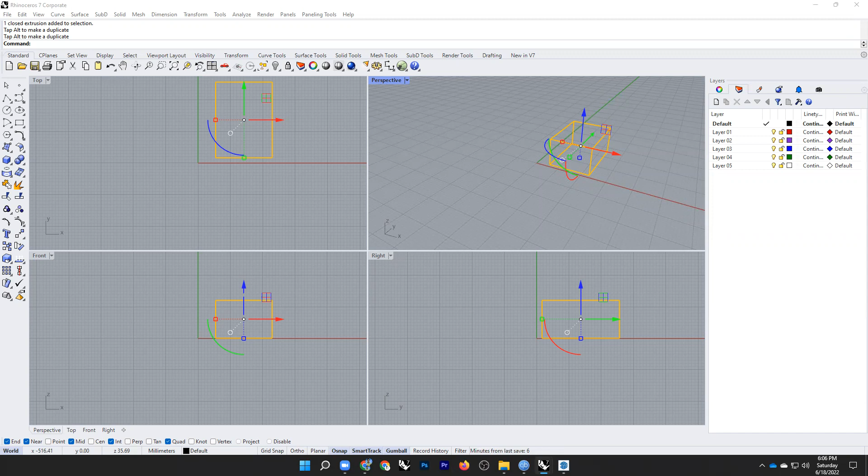So I hope you have learned all those carefully and practiced. First I will ask the students if anyone has any questions regarding the lessons that I gave in the first class, please feel free to ask. You can ask either in English or Japanese. 前回のレクチャーで分からなかったところとか、聞きたいところある方、ぜひ、発言、あるいはチャットに書き込みをお願いします。Any questions?

Okay, so I hope there are no questions. So I will start today's lesson. First, I will show you something, then I will continue in Rhino.

So Rhino is a very community-based program. You can find a lot of help in the internet and the community forums that are available. So after this course, when you work on your project or professional works, you will find a lot of problems and face difficulties. During that time, this part can be very helpful.

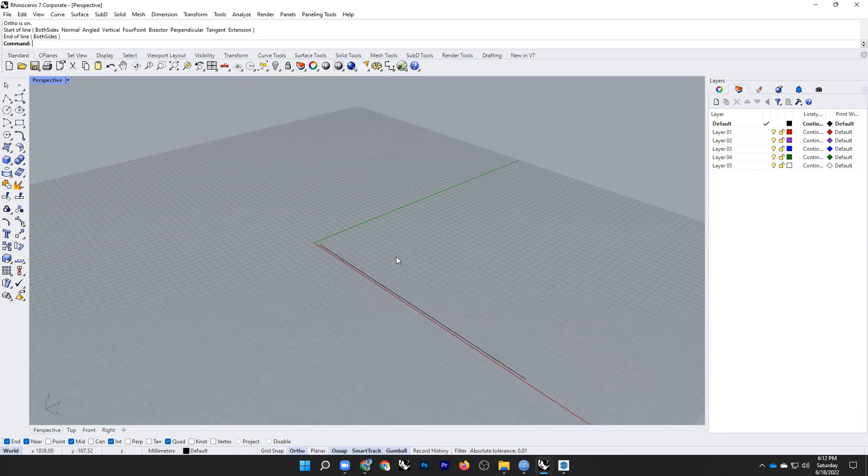One shortcut that is very helpful is F8. When you press F8, you can only draw a line perpendicularly. So when you are trying to draw something perpendicular, just press F8. When you are trying to draw something that is not perpendicular, you can press F8 again and draw the line wherever you want.

So this is for single line. Polyline is almost the same thing, but you can draw multiple line segments at the same time, like this, as a continuous line. When you are done drawing the lines, just right click and it will end.

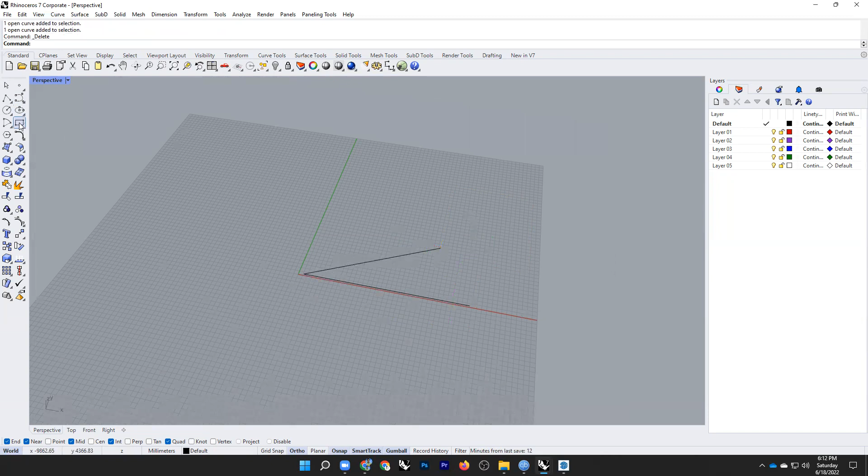Another shortcut you can do - I will remove these lines. When I'm drawing a polyline, something like this, if I want to connect the last and first point, I can just type C and enter, and it will connect the first and last point. It's very helpful - sometimes you need to close the curve and you can just press this.

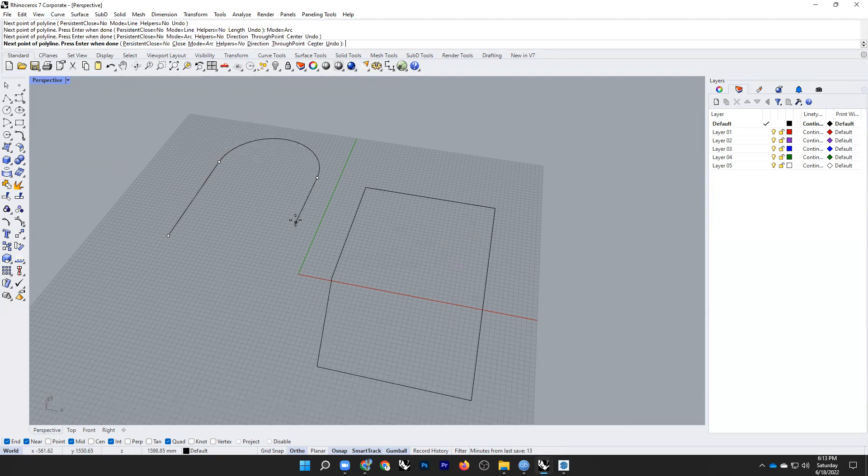Whenever you are actively doing something, you can see in this command bar various options. For example, now I'm drawing a line - if I go into mode, I can have arc, see? Then again I can go for another, and if I want to make a line, I can just make it a line.

Did you understand this, the last one that I showed? For example, if I have a room which is kind of curved from here, I can go to this mode and press F8, and again mode. So when you are trying to draw something like this, you can use this technique. Any questions?

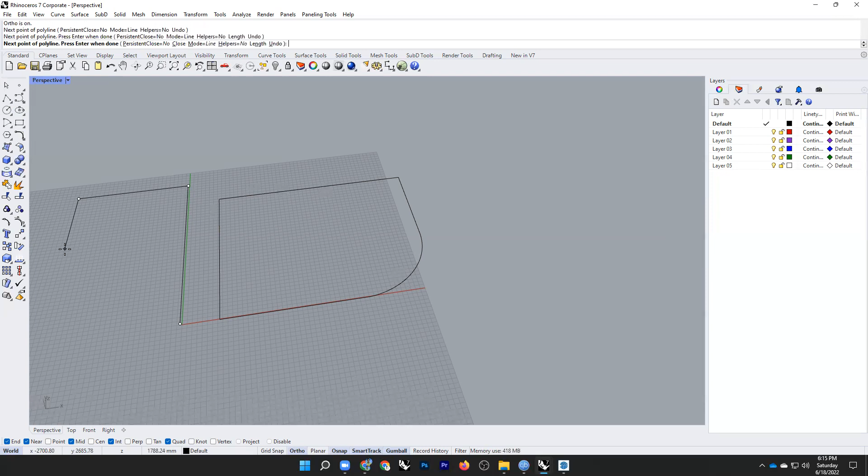Okay, so I'll continue. We have a lot of other options that are sometimes helpful, sometimes not. These two are very important: single line and polyline. Most of the cases, try to use polyline.

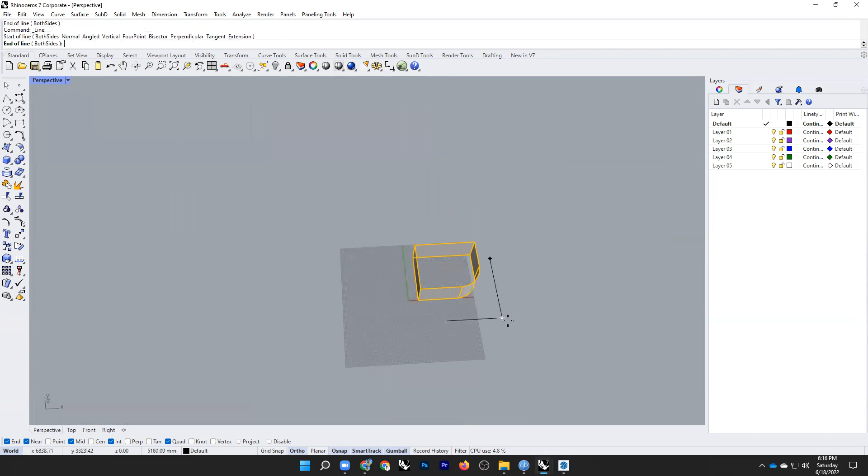The problem with line and polyline is that with a polyline, if you make this a surface, it's a single object. If I do the same thing using line, for example like this, and select everything and make a surface, it became individual surfaces. So it's not very helpful when everything is a separate object - it's more useful when everything is joined.

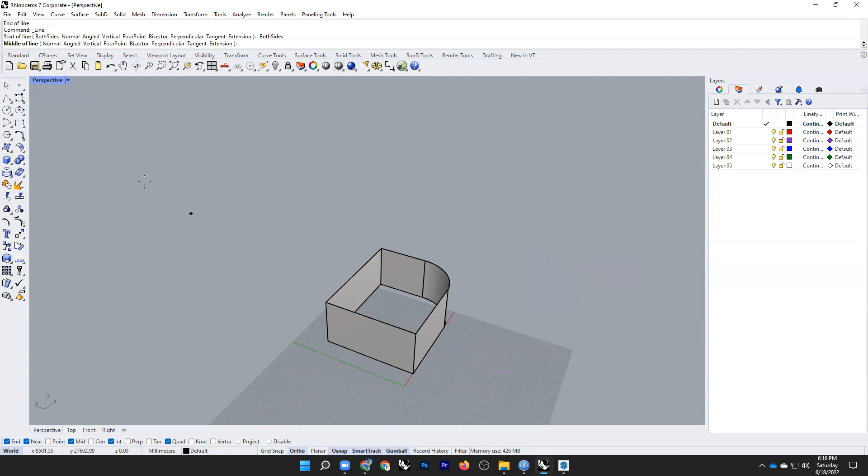So when you are trying to make a drawing, it's wise to make a polyline. Okay. Other options, something like this, are like you can draw a line from the midpoint. This option, what it does is you can draw a line starting from the midpoint.

Then we have this normal to surface - we can draw a line perpendicular to this surface. It will be helpful if you want to draw a line on a curved surface. For example, if you want a line on this surface, it's very difficult to draw a line perpendicular to it, but using this tool you can draw a line on the surface.

So this kind of other necessary tools you will find under this tab. I will not go into details on everything - you will learn when it's necessary. These are the basics, okay.

So the next topic is the various generic shapes that we need - for example, circle, rectangle, ellipse, etc. The first one is circle. You can draw a circle in various ways. This is very simple: you select the center point and the length of the radius, and it becomes a circle.

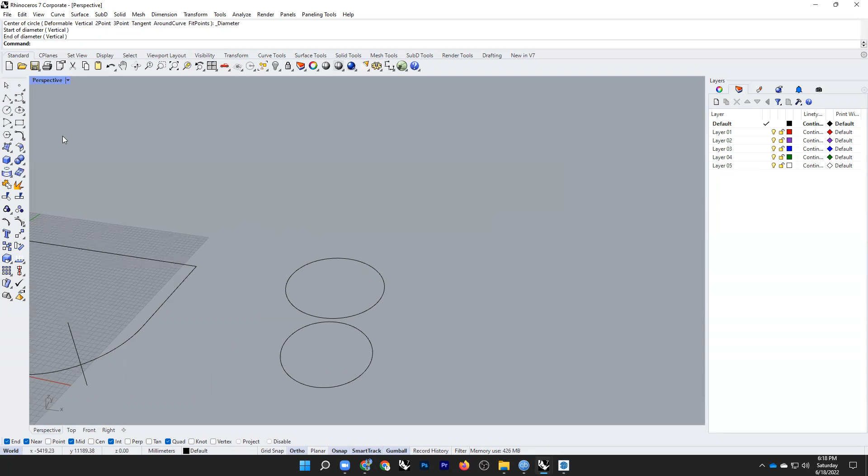Similarly, you can have diameter - so this is diameter. Then you can have 3 points, for example if you want to draw a circle which touches all these 3 surfaces, 3 lines. So this kind of circle you can draw with the help of these steps.

And there is ellipse - ellipse is also very simple. You can draw an ellipse like this. You always have the descriptions when you select something.

For example, if I select this one, in the command bar you have this command, like you need to pick the first focus. So this is my first focus. Then it's asking for the second focus, so this is my second focus.

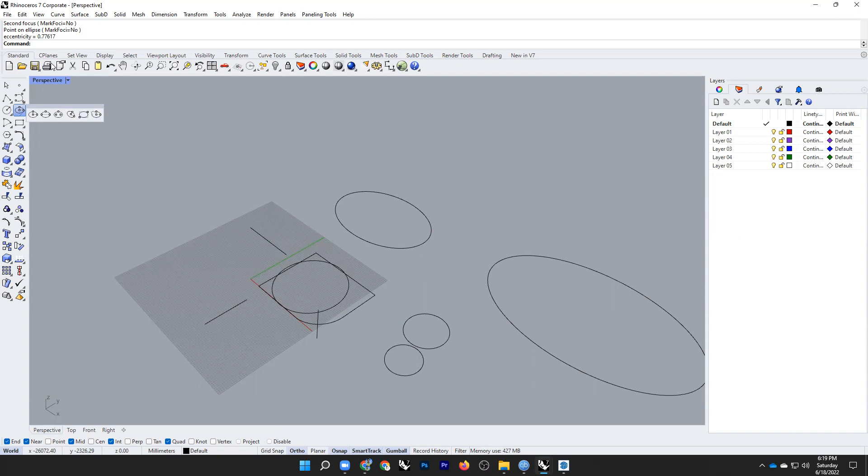And then point on ellipse, so this becomes an ellipse. Whenever you select a command, you will always have the options it's asking for in the command bar, so always look at how it's asking. For example, if I select this one, it's asking for the first corner and the second corner. So this ellipse is inside this rectangle, something like that.

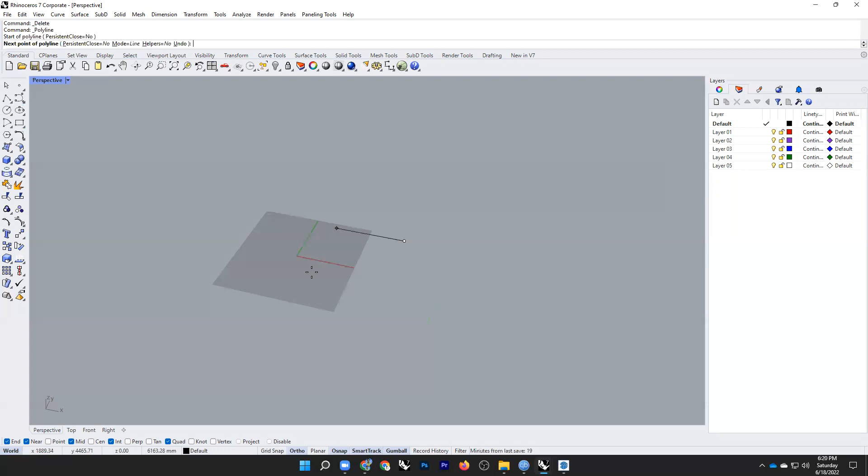Then we have rectangle, it's very self-explanatory: one corner, second corner, done. You can also draw a rectangle in various ways. For example, if I have a curved line, pressing F8, I can draw a line like this. If I go for these options, I can draw a rectangle perpendicular to this line. Normally when I draw a rectangle it's always along the axis, but with this option I can rotate the rectangle like this.

Okay, so these are a few options. Finally, we have this polygon. Whenever you go for a polygon, it will ask for the number of sides. When the number of sides is 3, it becomes a triangle. If I go for 4, I can draw a rectangle. If I go for 5, it becomes a pentagon. Similarly, you can pick any number and it becomes a polygon with that number of edges. So this is the way you can draw various generic shapes.

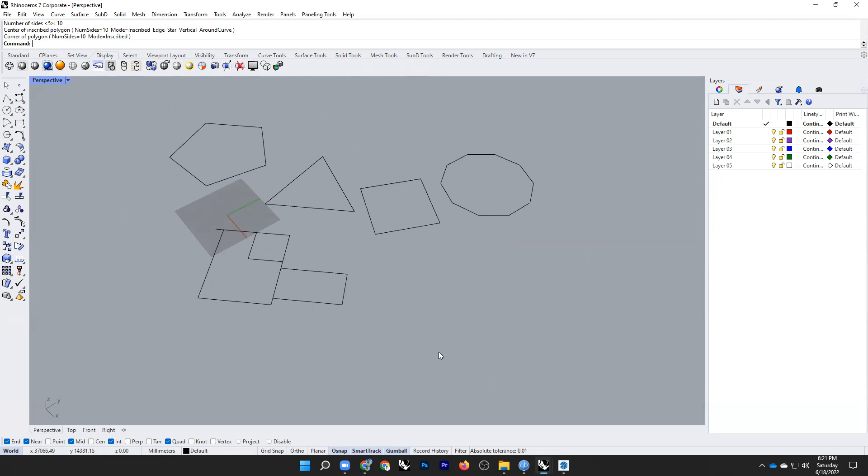Okay, would you like to explain, and please ask if anyone has any question.

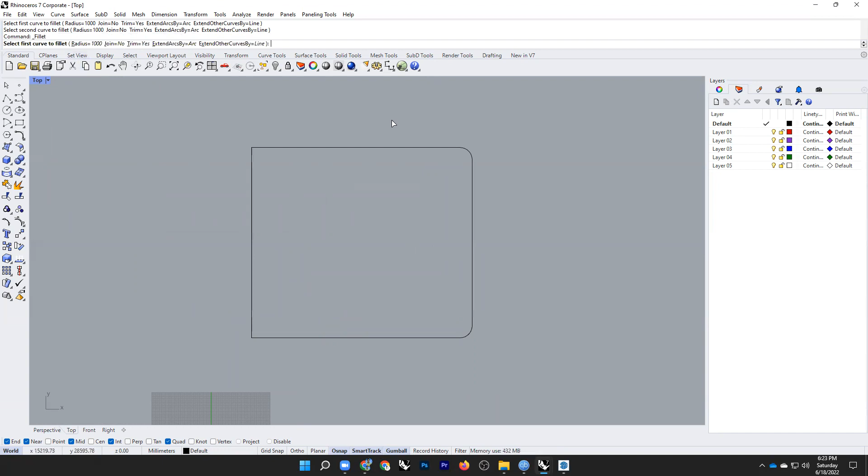And as I've already said, all these individual commands have other options, like do I want this to be joined, do I want the original curve trimmed, etc. So the join is set to no for now, that's why.

So if I go now, I give join, so now it's joined. If I set trim to no, and do the fillet, this is not trimmed, so we have the original curve and also the fillet one. Usually we want this to be trimmed, so make it yes, then you can do this and it will be trimmed like this. So this is how you do fillet.

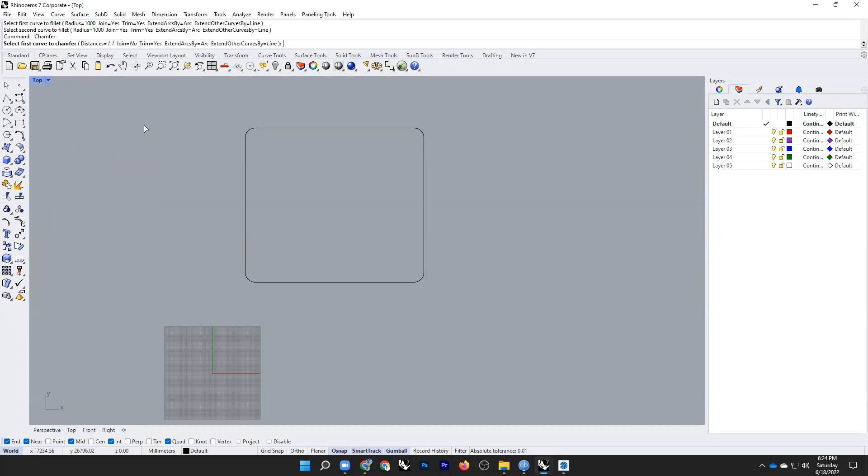Okay, there is another similar thing called chamfer. What it does is make this kind of angular. When you have two curves like this, it cuts like this and deletes this. Let me show you that.

Let's draw another rectangle. Okay, I'll do this. Next one, chamfer. We have two distances, the first curve distance and the second curve distance. I might want this to be longer and this to be smaller, and cut it like this. So you have these options, you can see there are two options, 1 and 1, written there.

And when I click on that, it's asking for the first chamfer distance, I can give it 2000. Second chamfer distance, I can give it 1000. Then if I cut, you see it's cut like this. So this distance was 2000 and this distance is 1000, like this.

The curve I click on first is the first chamfer, and the one I click second is the second chamfer. Another thing, have you noticed that I am using the last command without clicking or writing anything here? This is a shortcut. You can use the previous command by right clicking. Did you understand?

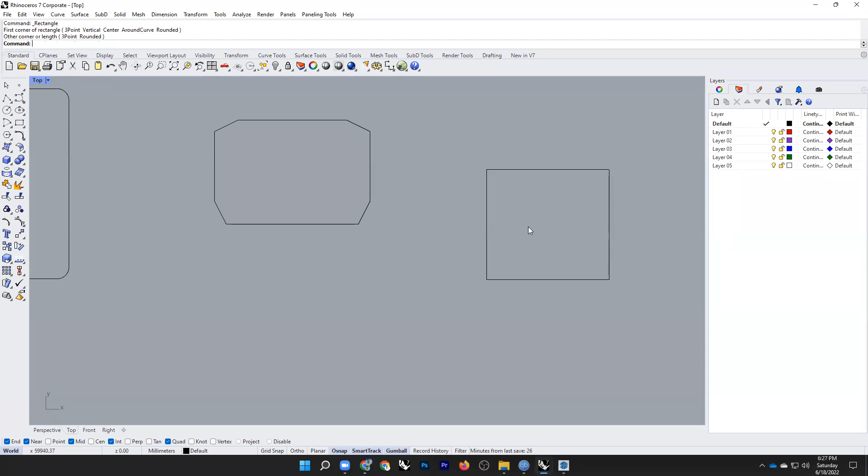Whenever I have used a command, if I want to repeat the similar thing or do the same thing again, I don't need to go here and click here or write the command. I can just right click and do the last command I did. This is very helpful for fast modeling.

For example, now I will show another thing, which is offset. Offset has a lot of options. For curve, just use the normal offset, and you have this offset distance. Let's keep it 500.

Now I can click on this curve and click inside and it will offset. Similarly, if I want to offset this one as well, I don't need to do all those things again. I can just right click and click on this curve. Everyone, have you understood this?

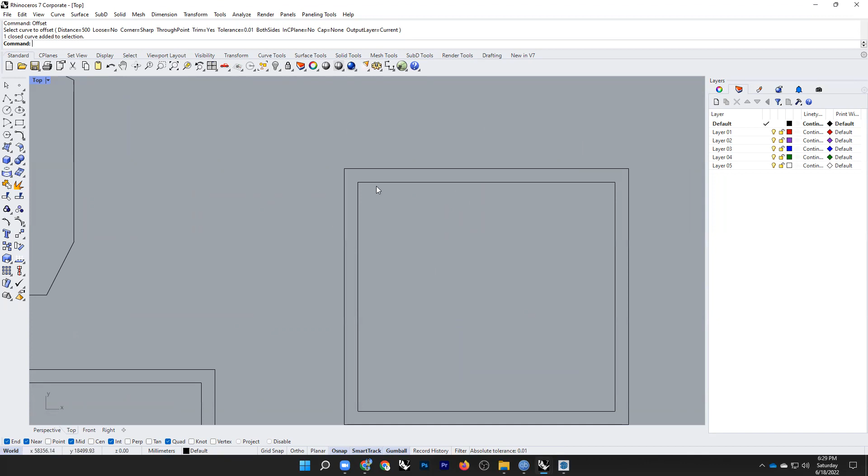So we have created a curve and now you know how you can edit various curves. I have already shown you, you can edit curves with Gumball as well. For example, if I want this offset to be more prominent here, I can just pick on this corner point and move it like this. This is the way you can edit a curve as well.

For example, I can press Ctrl Shift and click on this part and move this, and this can be changed. So this is the various ways that you can edit curves.

So now we will move on to making surface with these curves. The first thing that we'll show is planar surface. It's very important for our kind of work. So first you need to understand what is planar curve.

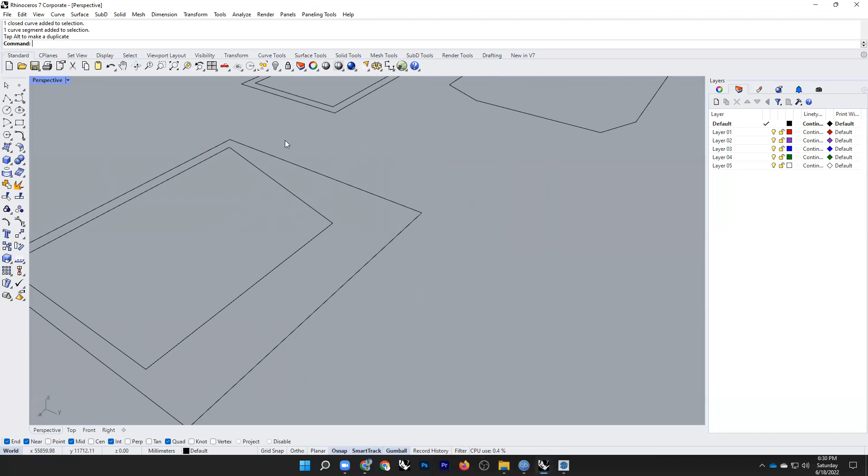Planar curve is something which is on the same plane, like on a flat surface. When a curve is on a flat surface, you can only use this command, otherwise it will not work. For example, this is a curve, and I know this is on a flat surface - flat surface as in elevation, there is no extrusion. So this is from elevation, it's just a single line, so I know it's flat.

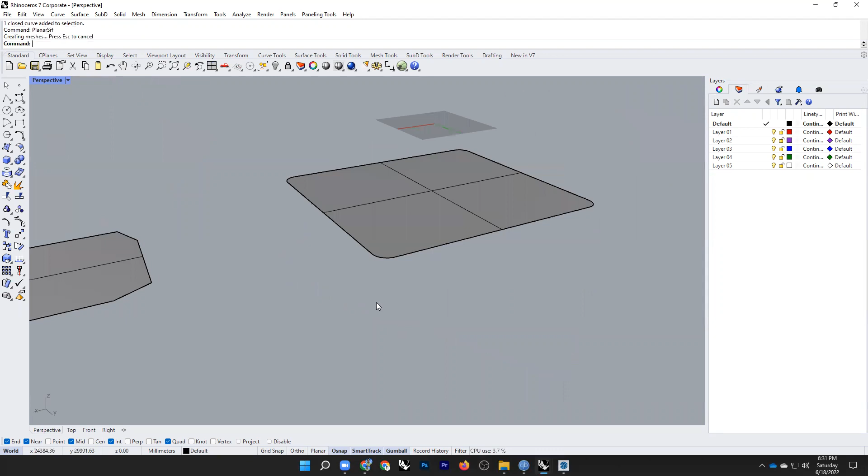So in that case, you can use this command. Just type planar SRF, PLANAR SRF. What it does is this curve works as a boundary and the in-between space becomes a surface. I can repeat this - selecting this curve, I write planar surface, and this is the surface.

For example, you have drawn two lines and you want to make a surface. If you select just one curve, it will make a surface inside. If you select only this curve, it will make a surface inside. But if you select both curves and type planar surface, it will make the surface in the intersection part. But sometimes it does not work.

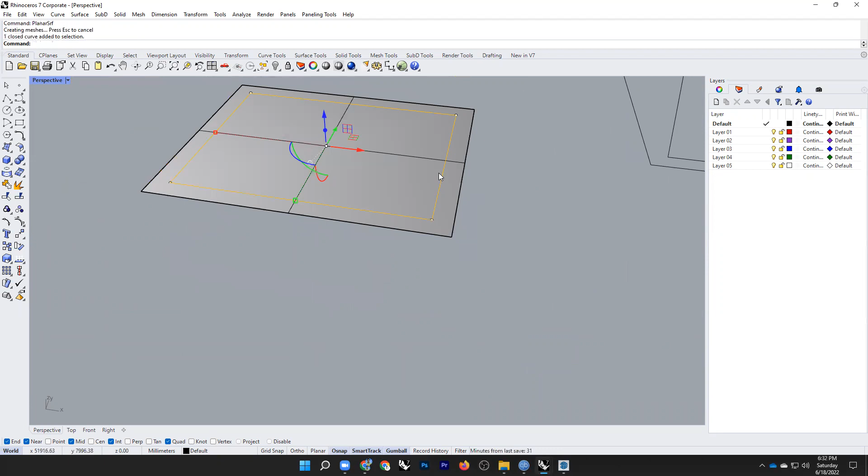Most of the time it will work like this, but if it does not work, we can do this: you can create planar surface and then trim with this inside curve. So selecting something, if I write trim, it will ask me for the object I want to trim. I want to trim this surface, so I click on this surface and now it trims.

Similarly, I have this drawing. Now I can press planar surface. I see already I have this intersection part as a surface. And if this is a wall, I can just now extrude and make it a solid object. So usually we have drawings from AutoCAD, or maybe we can draw the curves inside Rhino, then we can use this technique to create walls.

Okay, so any confusion, anyone?

I guess not. This is the way you can create surface from curve, but you also have options to create surface directly. I'll show you that now. In the meantime, if you have any question, please ask.

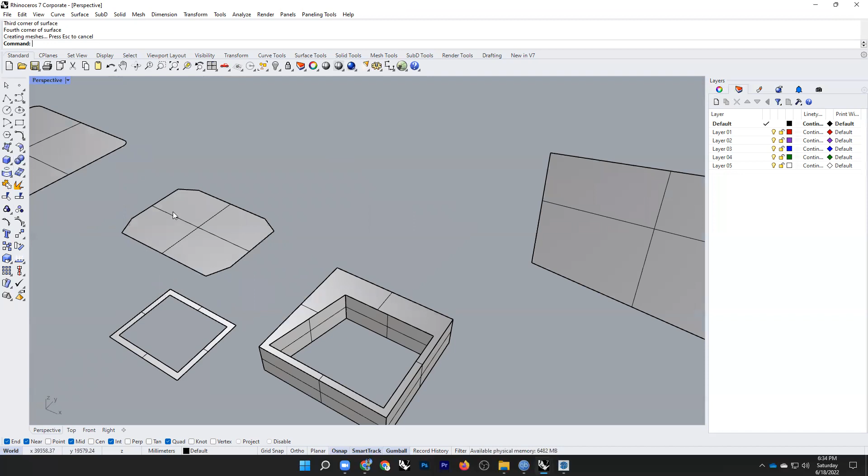And this planar curve, this is what I already showed you as planar surface. So when I have selected this curve and click on here, it becomes a surface. Very simple. And the next option is surface from network of curves.

This is very interesting. When you are creating something very organic, you can go for this option. I will show you an example now.

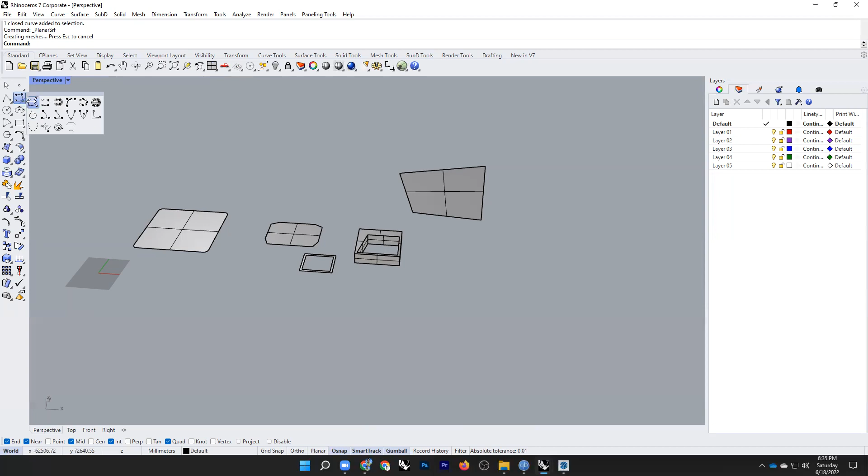So one thing I didn't show earlier is how you can draw spline, I mean curve lines. This curve line tab is here that we didn't show earlier. The first option is control point curve. Basically it makes this fluid curve. You can just go through various points and it will draw a very smooth curve along these points, something like this, and you can edit this curve by pulling these points.

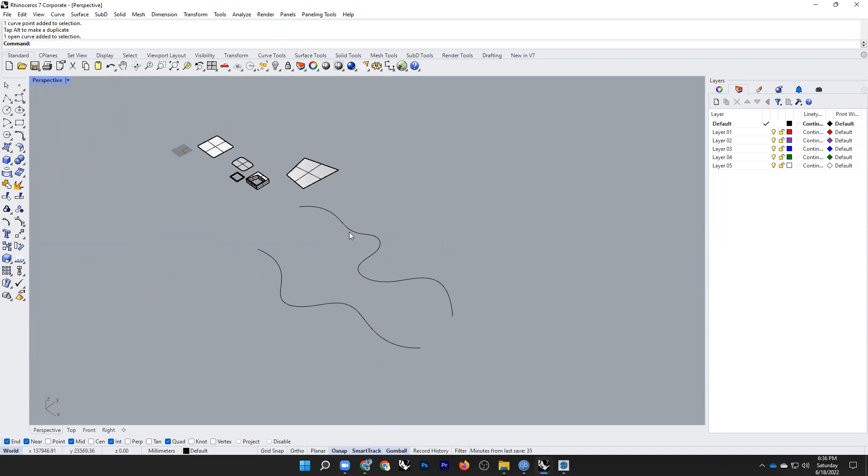So you can have this various kind of smooth surface. If you have this kind of curve points and you want to make a surface from these points, you can use the latter options. The first one is surface from network of curves.

So it will not work, I guess. For this, I will need to draw another curve in another direction. I will draw that now, so after that you can understand how it works. I will make a curve like this.

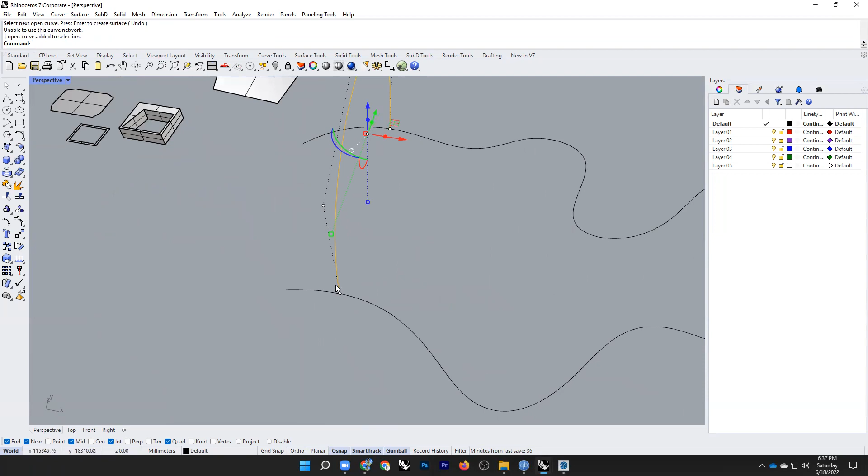And now if I go to this point, I will have to draw another curve. I will move this curve to these edges. I will copy one of this curve, this point to this point, and I will join this. So I am kind of making an outline of the geometry that I want to create.

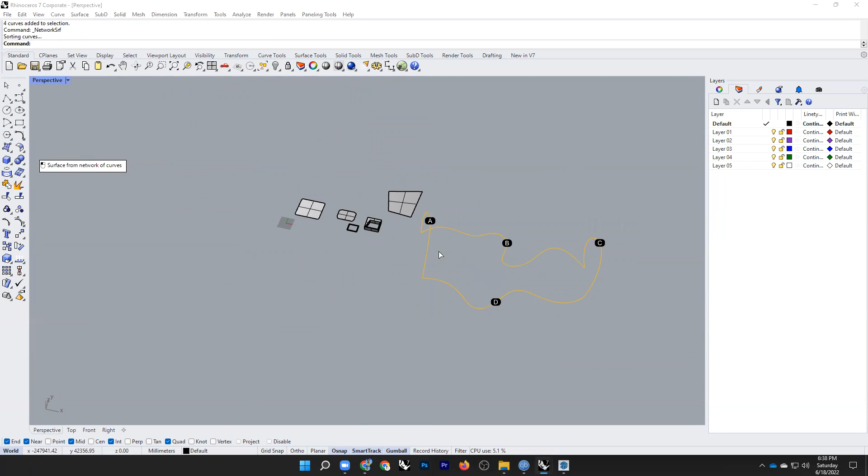So after that, if I select all this curve and go to this option, curve networks, I will have this tab, edge curves. Let's increase this, otherwise it is very huge. Let's give it 5. Something like this - so see, we have this very interesting shape just from 4 curve outlines.

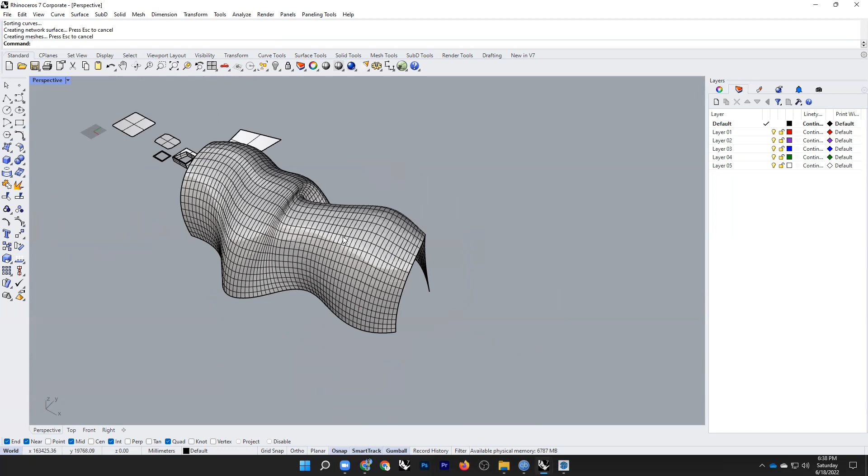So I will repeat the same process again to show you how this curve network works. For curve networks, you need 2 directional curves in each direction. For example, if I go to the x-axis, this is my one directional curve, and I need a second curve direction like this, and then I will draw 2 more curves in elevation. So like this. Then I can modify this curve by pulling the points upward direction.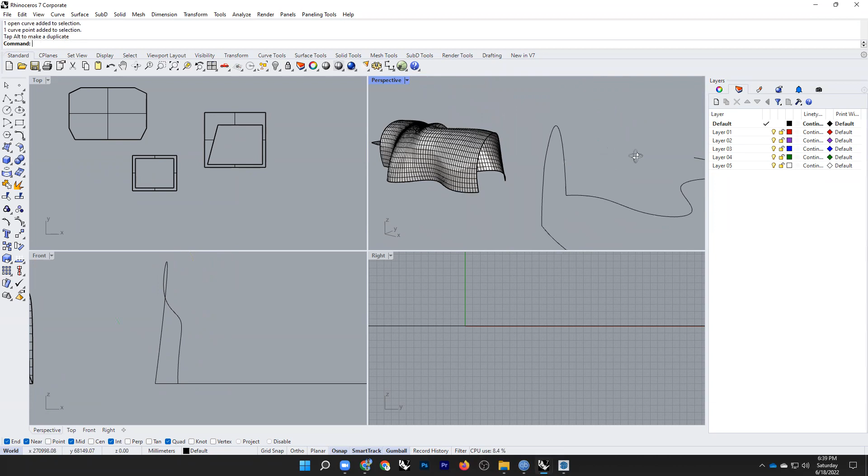So basically it's kind of making a sculpture. You are making an outline of the geometry that you want to create. Something like this - it can be anything, doesn't really matter, but something that you want to create.

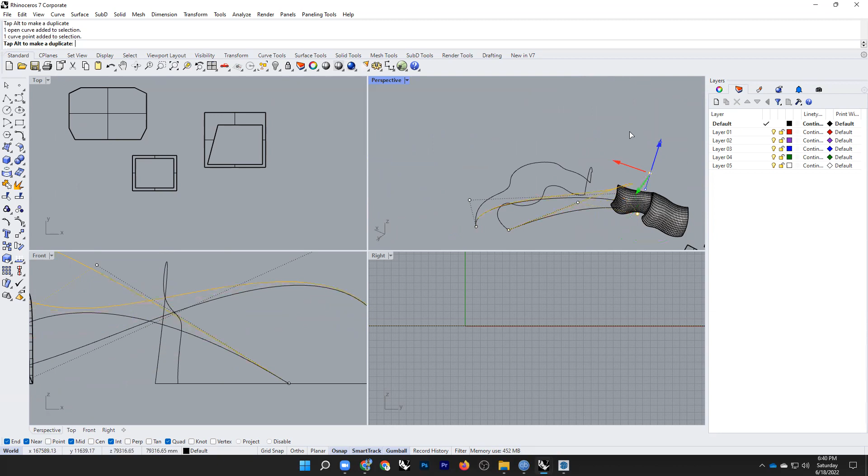So this is now flat. I will make it like this. This is very large. That's a bit crazy - yeah, it's better to draw these lines in the top view so you can have an idea what's happening, otherwise it goes crazy. But for example, we can do whatever we want, like this.

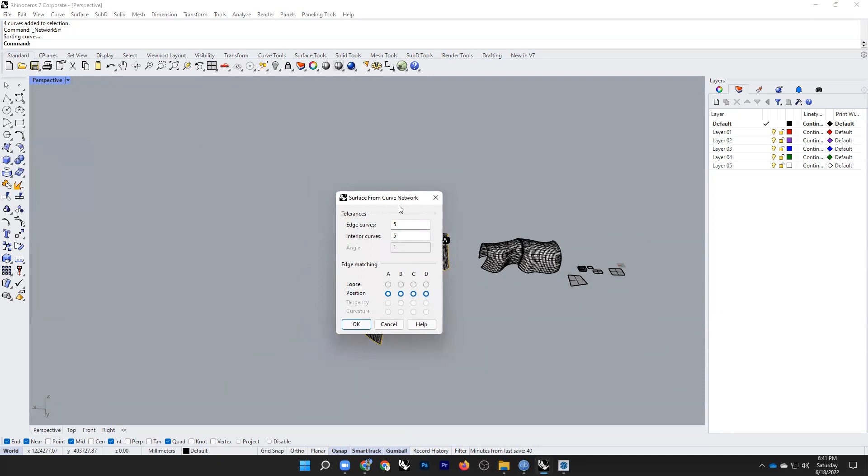Okay, so this is the kind of geometry that I want, for example. So I will just select and go to this curve network. And when there is a lot of curve, you can decrease it by increasing this value - interior curve maybe 5, or maybe higher. Okay, something like that, so I go for it, and we have this kind of crazy shape.

So it basically uses this curve and this curve as a section and kind of evolves around these edge lines, makes this shape. So it's helpful if you want to make something organic, crazy like this. Yeah, this is where Rhinoceros really becomes interesting. I think all students can start playing around with this sort of tool. So you can have a lot of freedom working with organic geometry when you are using this kind of shapes.

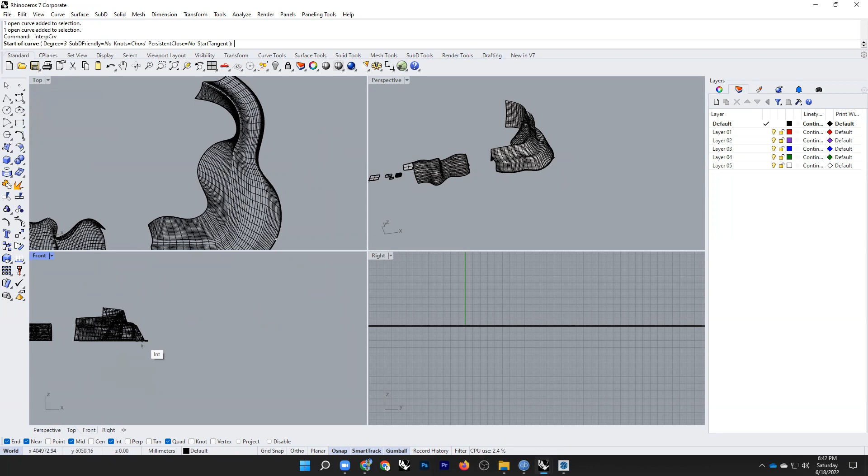So next, I will show how you can use loft and why loft is very powerful. Loft is another similar kind of option that you have in Rhino. For example, I have this very rough shape. I can make some copies and I can make changes in here.

For example, let's change the shape. We delete something like this. I will delete this, I will make it small, like this. Okay, let's see, we have these 4 lines. We can select everything and use loft to create a surface that matches and merges all these curves.

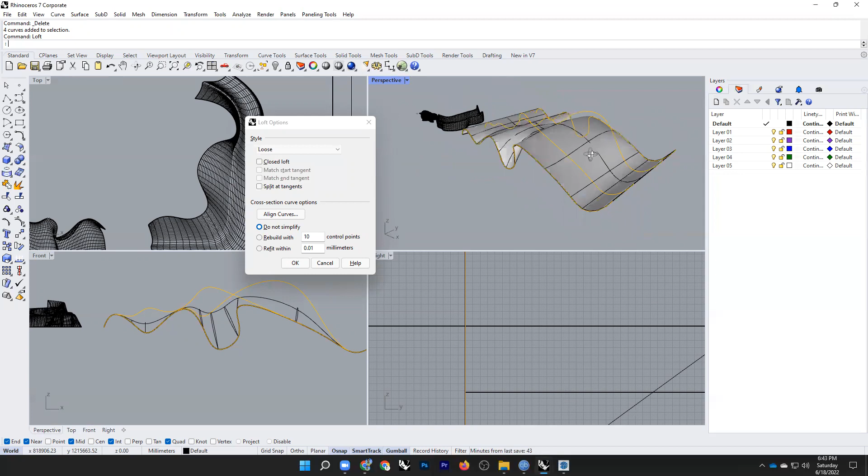Okay, so I have various options like loose. What loose does is make the surface smoother, but it does not match with the curve - you can see there is this gap. When normal, every curve will be touched perfectly. So loft is another option that is very useful to create this kind of organic shapes. So we use network of curves and loft.

Is this understanding? I'm not sure. Can you guys ask other students if they understood?

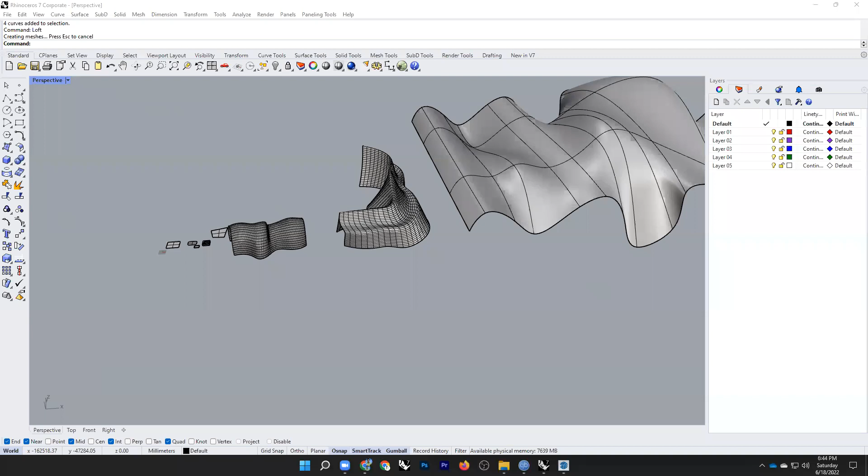So another thing that we sometimes need - for example, I will work with the solids in the next class, but for today's example, I am using this.

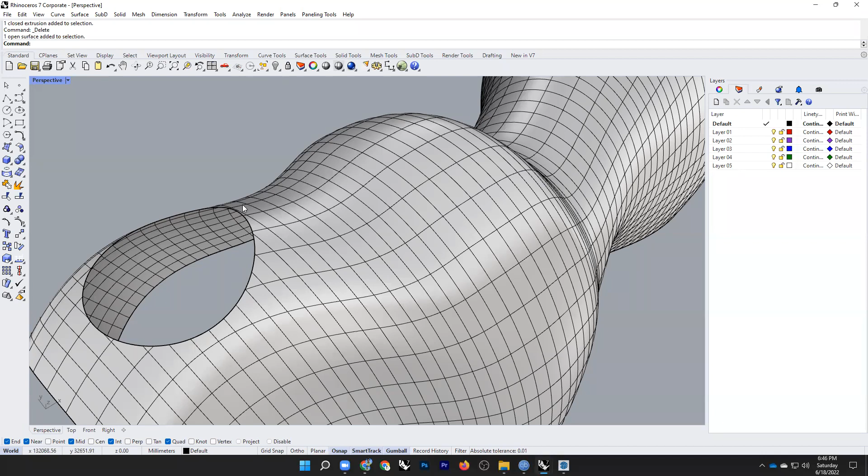So what I did, I used that solid object to trim this surface and make a hole. And for example, now you want to close this curve, close this hole. Now the problem is you cannot use planar surface because this edge curve is not planar anymore. It was on a curved surface, so this edge line is kind of on a curved plane. So in this case we can use another command called patch. For that we can select this curve, pressing Ctrl and Shift, click on this and select this curve. And now we can just press patch, and what it does is it closes the hole.

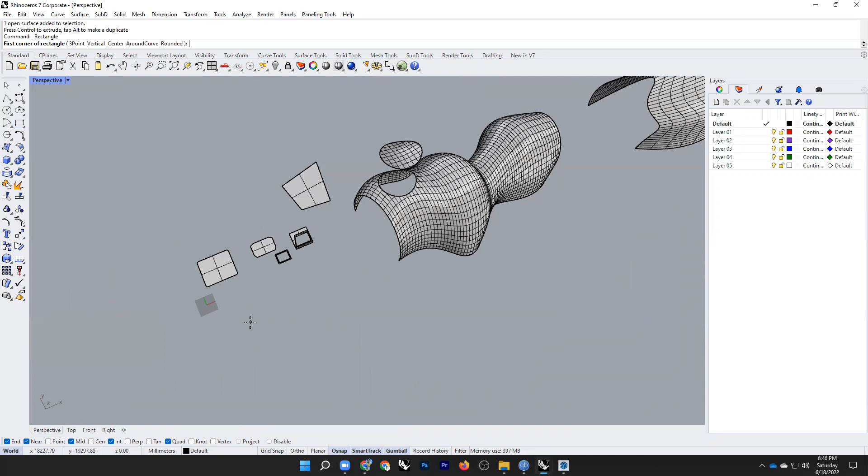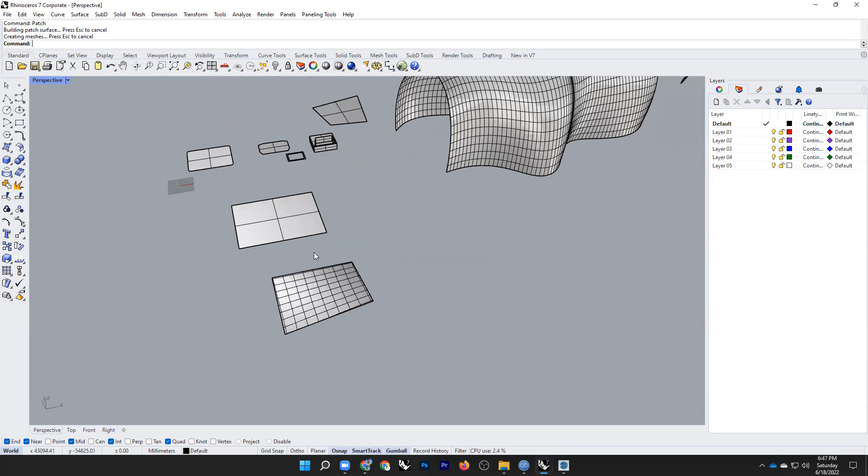So what is the difference between patch and planar surface? Planar surface only works on a planar curve. But when the curve is not planar, for example, if I select this point and give it a height, this is not planar anymore, right? This is kind of twisted. Now you cannot use planar surface. If I go for planar surface, it says no faces were made, curve must be closed and planar. But in this case I can use patch. It asks for how many divisions I want. You can increase or decrease this and press OK, and it makes a surface on this non-planar curve.

So we have other options to create this kind of surface. I showed you a few of them: this patch, then planar surface, curve networks, etc. I will show a few more.

So let's go for this pipe option. When you have a curve like this, you can select this and use the option pipe. What it does is it makes this line into a pipe. So you see, it becomes a pipe like this. Whenever you have a line, you can make this a pipe. So for pipe, I will write pipe.

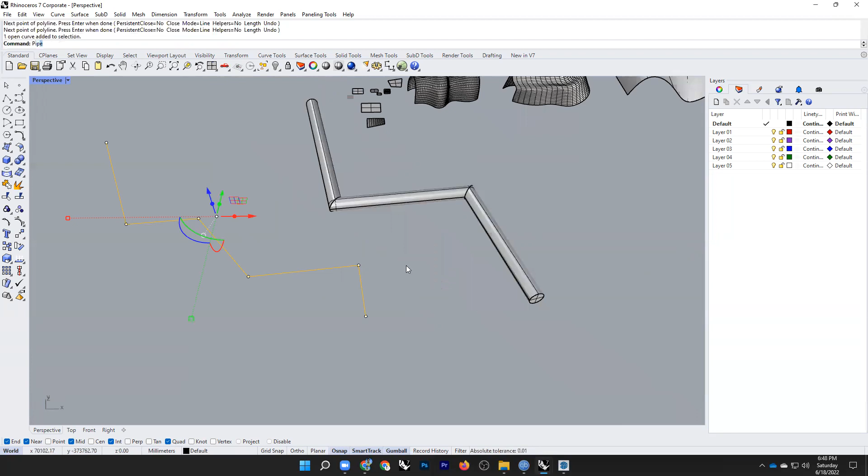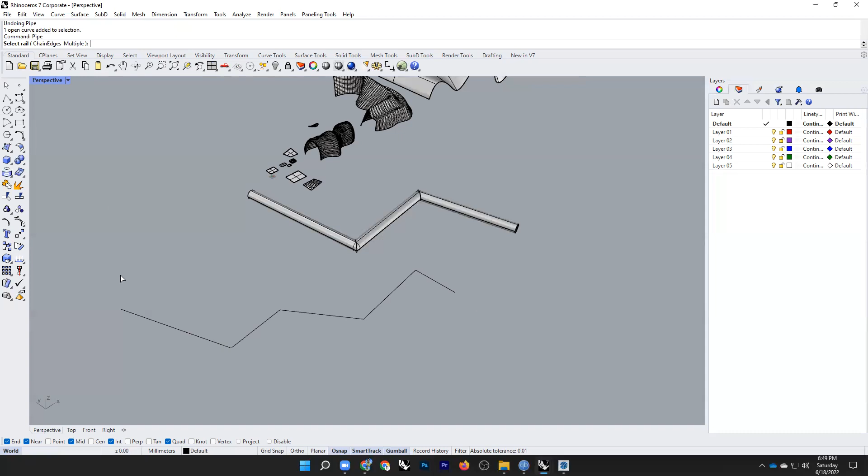It's asking for a start radius. You can eyeball it and give it anything you want, or you can write something like 5,000. Then press enter. It asks for the end pipe curve radius. You can give it a different radius, for example say this thick, and I can press enter, and it does not work because it needs to be the same thickness if you are working with a polyline. I will show you how you can work with that as well. But if you go for the same thickness, it will work like this. Okay, let's press enter two times.

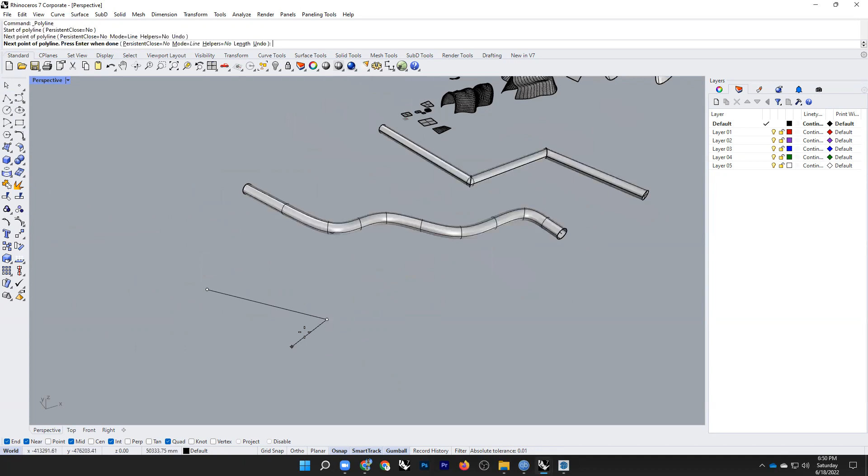Okay, if you have this kind of curve, Rhino 7 introduced a new thing called multi-pipe. Pipe radius, I can give say 10,000. So this kind of makes this curve into a very smooth pipe. It was a polyline, but it makes it a very smooth pipe. You can also do something like this. For example, if you have multiple lines like this, you can select this and go for multi-pipe, and it will form a joint pipe like this.

So this is a few more options that you can create surfaces with. I will show two more things in today's class. One is rail.

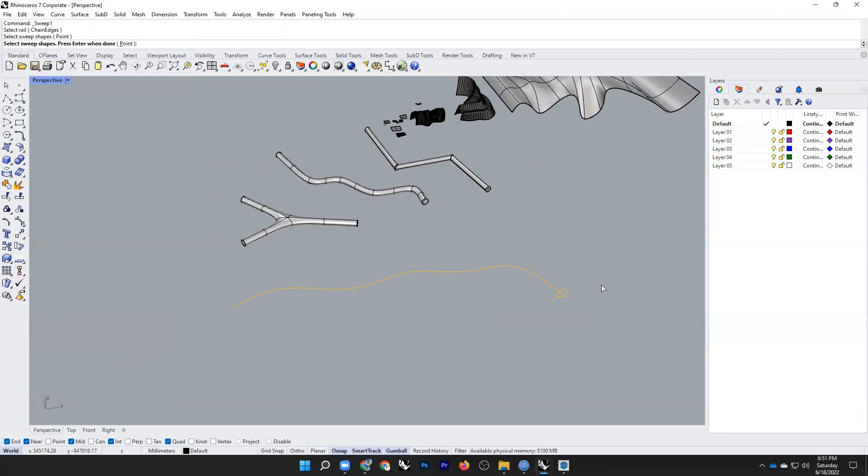So rail basically does, let's go with this line, something like this, and you can have any kind of section. I will make it 90-degree rotated, move this to this one, and I'll go for rail, under this surface tab, sweep one rail. We have two options, well first let me show sweep one rail. What it does is it's asking for select rail, so I'll select this rail and sweep shape. I will select this shape and press enter. It's asking for freeform or roadlike, and you can go with freeform, doesn't matter. And what it does is it kind of makes this shape flow with this curve and make it. Using this you can make railing, road, and other similar kinds of stuff when you are modeling.

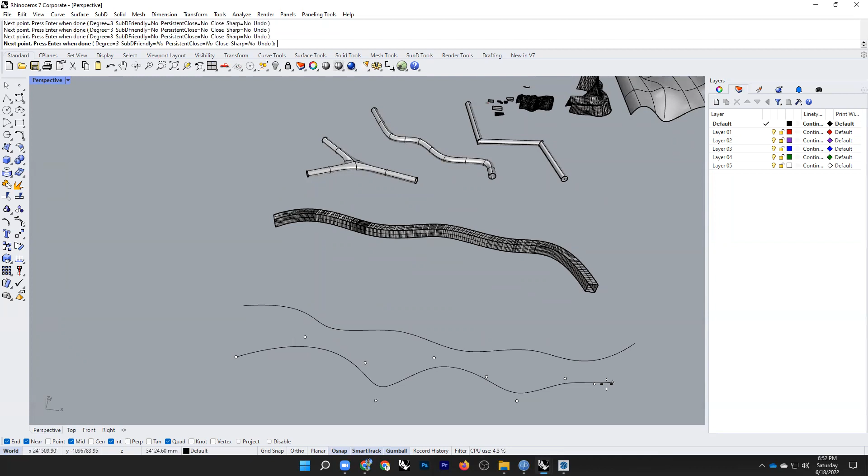Okay, so this is one. And we have this second option, sweep two rails. I will show that as well. So if you have one curve like this and another curve like this, and for example we have, let's go with circle, I'll just rotate this.

Maybe a bit more, something like this. I will move this to one of these.

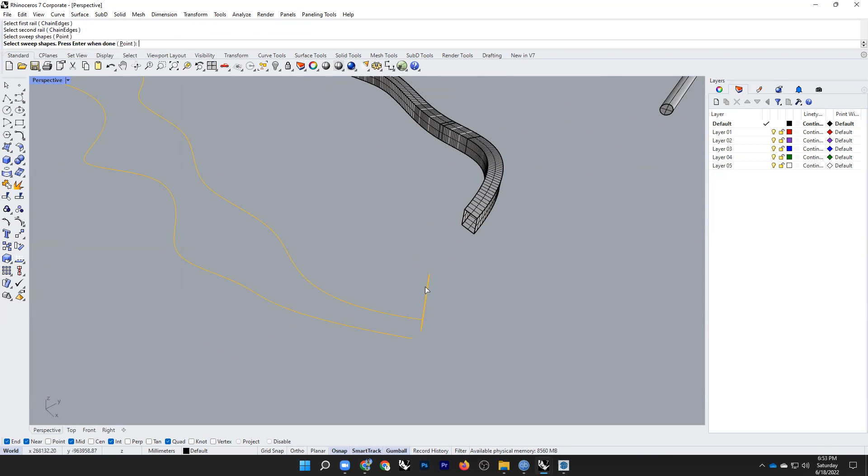So if I go for sweep two rail, first rail, it's asking for second rail and sweep shape. So you can see what it does. It uses this shape and it flows along these two curves.

So you can understand we have this large gap. Here we have this small circle, and a smaller gap. When we have again a large gap, we get this large surface like this. So this is also a very useful trick to create interesting shapes.

So this is one thing that I wanted to show, and another thing is this revolve. Let me show revolve in one elevation. For example, you want to model a shape like a bottle.

So for example, we have this, I don't know, this kind of bottle or flower vase or something like this. In that case, you make this. So what I'm trying to do is like, we have a bottle like this, right? Something like this.

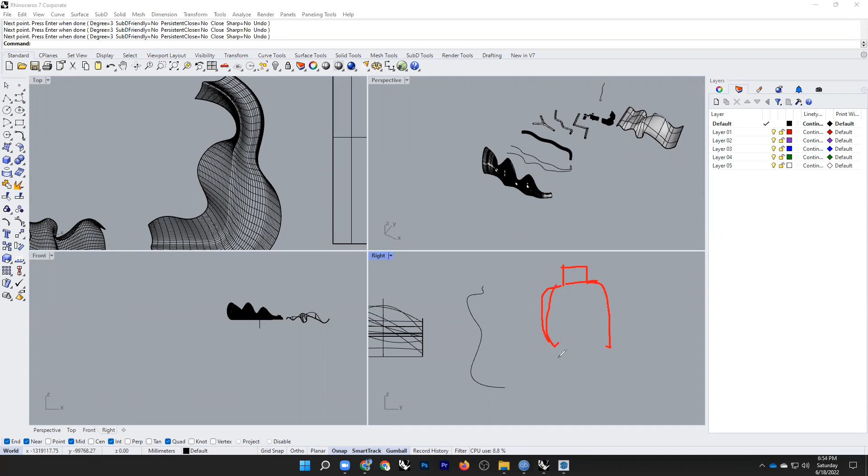So what you need to do is draw just one portion of this bottle, this. Just draw this one. And when you go for this revolve option, it's asking for the revolve axis. So this is my revolve axis.

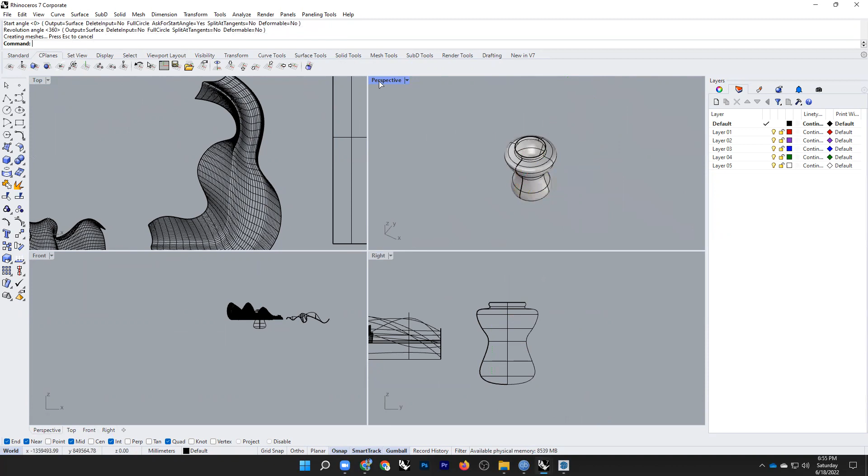Then it's asking for the start angle, 0, and revolution angle, which is by default 360. I will go for 360 and see, we have this bottle-like shape. So if you are trying to model something like this, a flower vase, bottle, or something round, a revolved shape, you can use this revolve option. These are the various options you can use to create various kinds of surfaces.

So anyone, any questions, or if you want to see something else, please feel free to ask me.

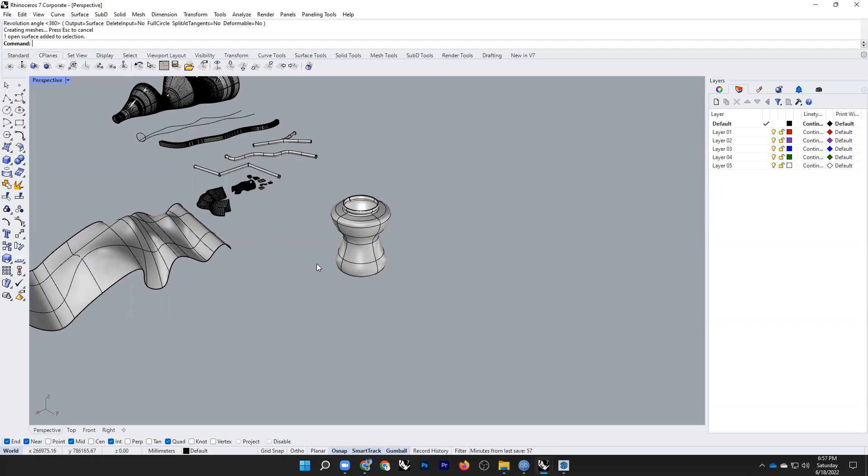But my advice would be to produce something you want to produce. Unless you try to design something you want to design with Rhinoceros, you don't come up with the questions and the desire to solve the problem. So my advice is to design something with Rhino that you want to design.

How about yours, Shajib? So the first thing you should do is try to create the drawing, the basic plan, using the Rhino tools. For example, you have this room. Just the best way is to practice, obviously.

For practicing, just take one of your previous designs, maybe a residence or anything you have designed in your academics or anywhere. Try to make a drawing, the basic drawing. For example, just draw the rooms and draw everything like this, just using the basic drawing knowledge that you have.

For example, draw everything like this. Maybe you have stairs, so make a copy like this. So try to produce a drawing first.

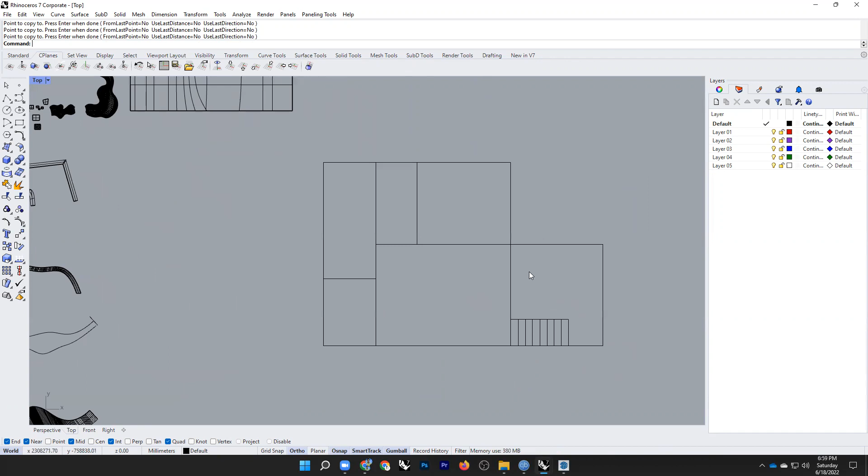Then using that drawing, you can create the building. So now, as I have the drawing, I can create an offset, right? So I will just offset maybe something, 1500. I have created this very large.

So try to make drawings like double line drawings. Let me show you quickly. So I have created this double line drawing. Now try to make the walls. For that, just select everything.

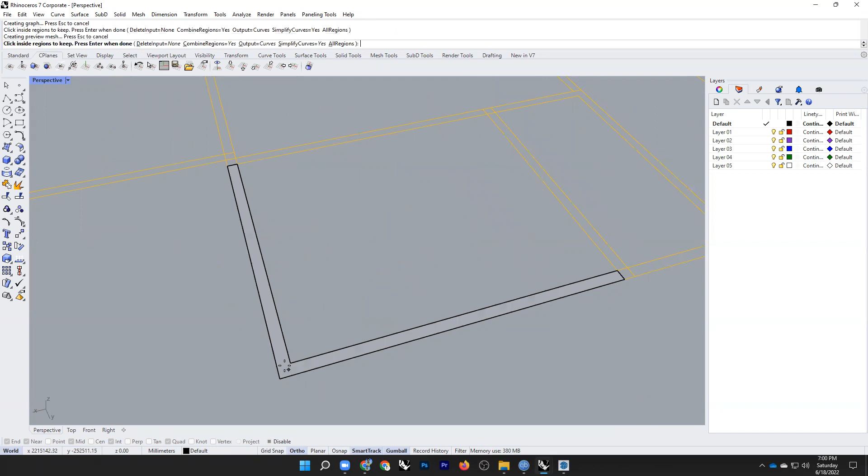Use another command that I have not shown yet, called curve boolean. So go for curve, then curve boolean. Select this one, and now you select all your walls. So this is one of my walls, like this.

Okay, so maybe I don't have a wall here. So this is all the wall. Okay, now this is a curve. You can just press planar surface. Oh, I have this issue here.

So go back, I will do the operation again. It does not happen if you have a proper drawing. I don't have a proper drawing, so this is happening. Let me show you quickly.

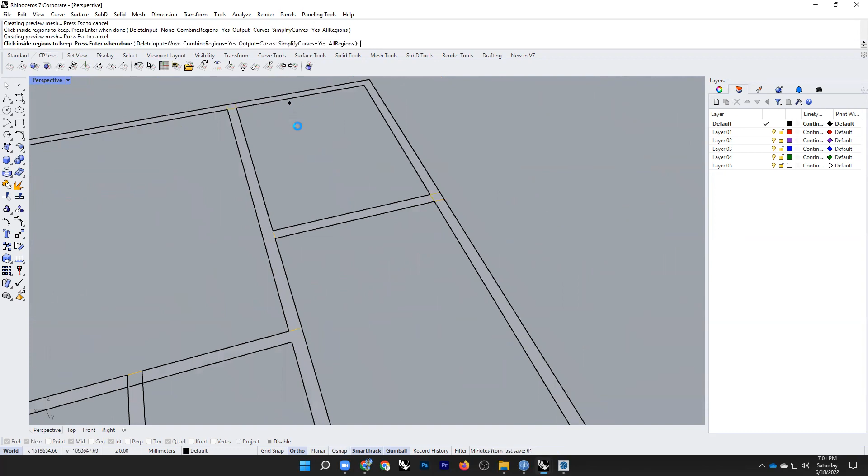Yeah, it should work. So I will go for planar surface. I have this surface, where there is my wall. So now under this selection tab, you can select the last created object. So we created this surface in the last command, so the surface is selected.

Now give this a height, so I have all the walls of my floor. Now I need to create a floor plate, right? For that, I can just quickly draw a rectangle, select this rectangle, go for planar surface, and give it a thickness like this.

Then again I can create stairs. So here is my stairs. So I created a surface. I'm just eyeballing the sizes; we will need to input the actual dimensions.

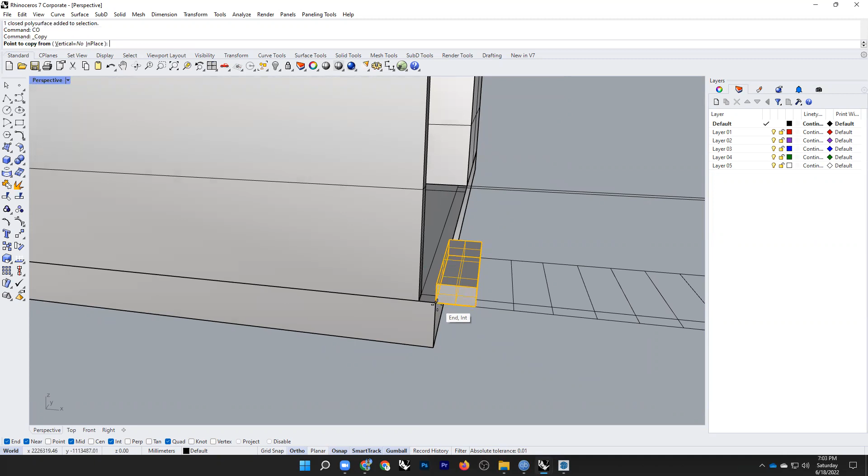Now I can just make copies to create the stair. So you already know all these options, right? So using this, try to recreate one of your designs in Rhino using the curve and surface and solid tools. Maybe after the third class, you will know better about working with solids.

It will be easier for you, but start working, at least make a drawing. Then you will learn a lot of things and face a lot of questions that you can discuss in class.

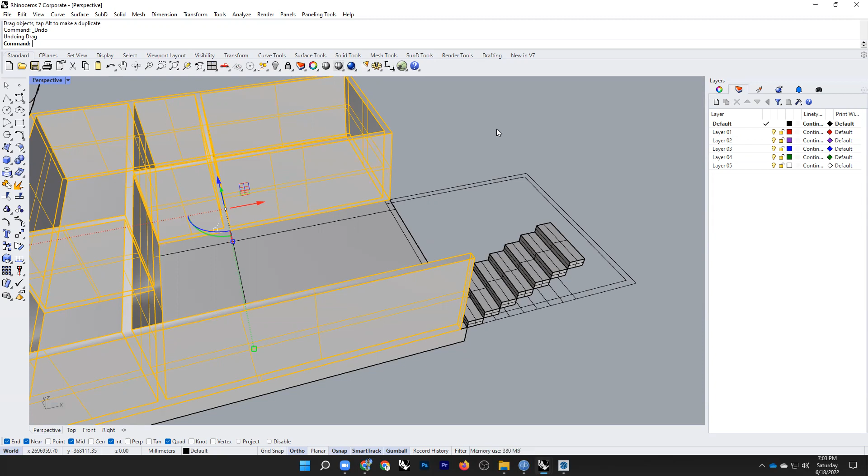過去にデザインしたものをもう一回ライノで作ってみるっていうのは、迷わずに作業ができるのでいい方法かもしれませんね。どうでしょうか？答えになっているかな？もうちょっと違う回答が欲しかったらおしえてください。ありがとうございます、すごいためになりました。

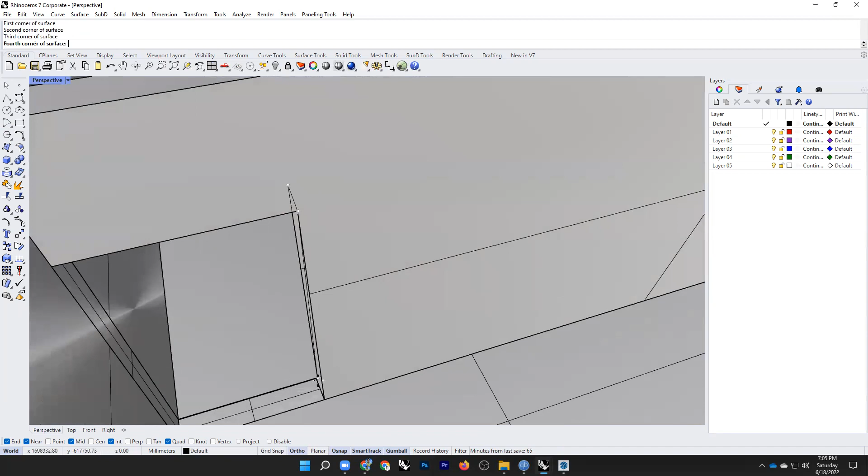My advice would be: don't try to be perfect. Shajib is making a cover surface for the opening, but you can just roughly start modeling. Make a rough model, you don't have to make a 100% OK model. とりあえず形が立ち上がることの楽しさを感じるっていうのが上達の近道かなと思います。

So it depends how detailed your drawing is. If your drawing has openings for doors and windows, you can create the walls excluding the doors. As my drawing didn't have the openings for the door, I had to create this manually. But if you have a proper drawing, you will not have this issue.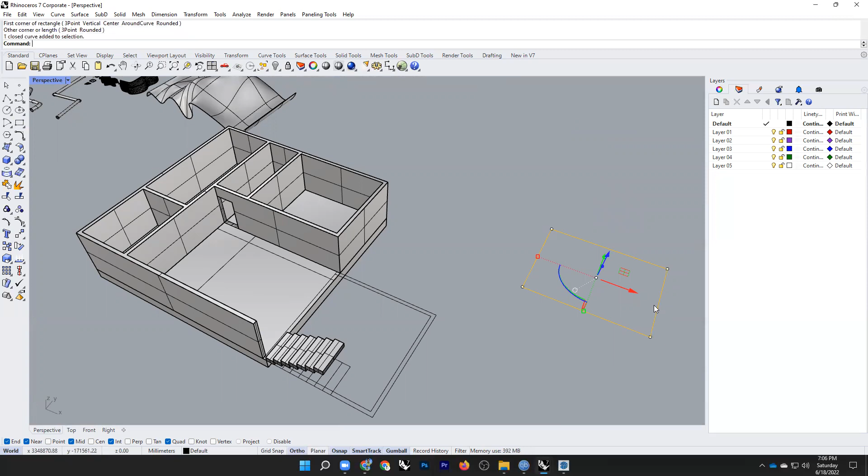Or you can do a Boolean surface, can't you? For example, if this is my door and this is my wall drawing, I will select this, go for curve Boolean, select only this part and the inner surface, and draw like this. So I have the opening for the door.

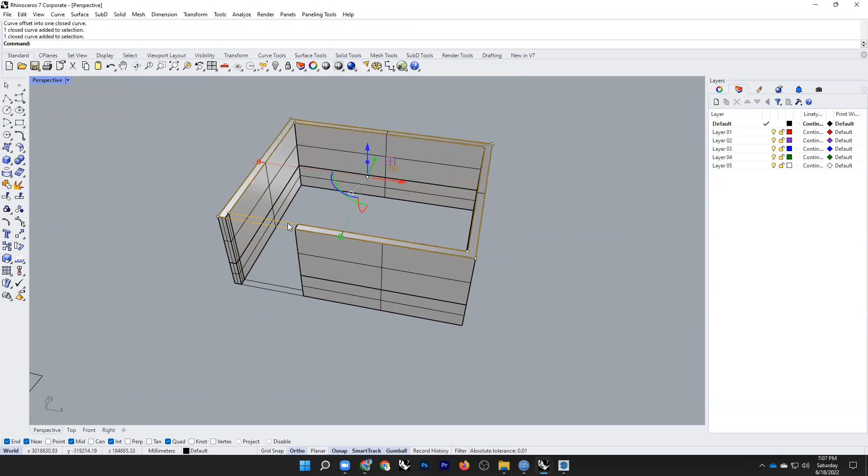Now I have this door and ceiling on different layers. So make the drawing properly, so you will have less trouble with the 3D modeling. Any question? 他にご質問ないですか？ゆうきさんとかいかがですか？

As you have introduced creating organic shape surfaces, I would like to show one trick for everybody. Is that okay? Just one minute, I would like to share a useful trick for making nice surfaces and nice curvature. Do you see my screen? Yeah, okay, you can see.

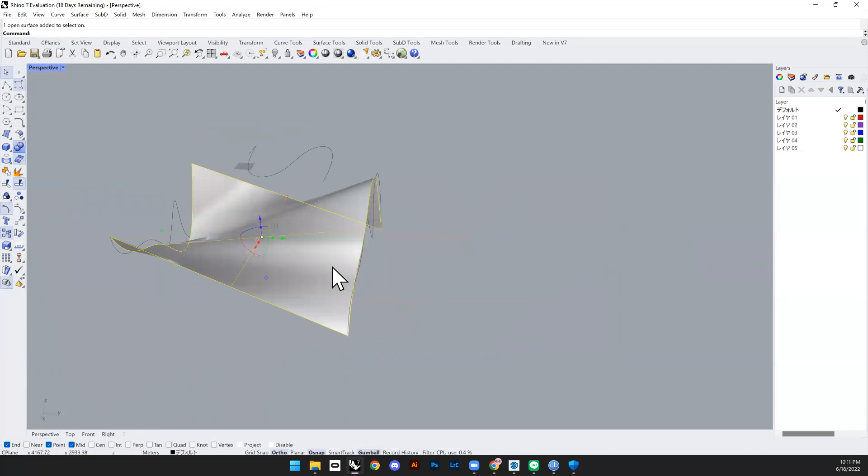That's a useful skill, I think, for everybody. I was introducing the rebuild tool to make ideal curvature and surfaces. Yeah, that's very helpful. And you can do this rebuild option on surfaces, meshes, basically everything.

Okay, is that about it for today? I think so. じゃあ、一応今日の2回目のレクチャーはこのくらい。I will just show one last thing, as you have already shown the rebuild option. Very interesting, I'd like to show more, you can see the screen, right?

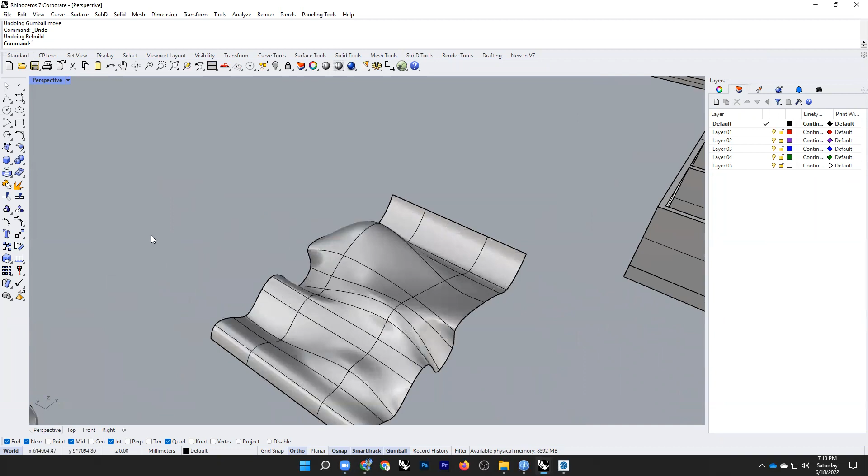So we have created this surface in our previous loft option. You can also rebuild this. When you rebuild, we have these options for U direction and V direction curves. Let's go for 15 and 15, so there's a bit more detail. And we have made a new surface which has very smooth curves.

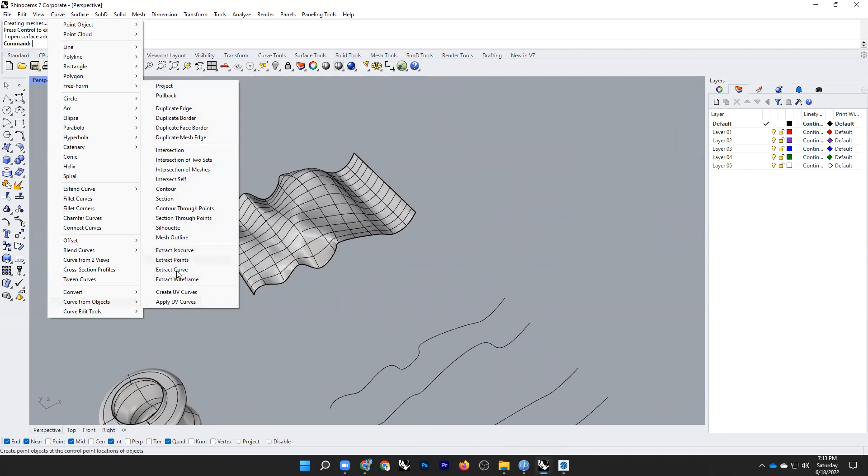And under this curve tool, you have this option, curve from object. If you go to extract wireframe and select this, press enter, you can extract the curve from this surface. And from here, maybe you can do this.

That's clever, I didn't know that technique. You have worked with waffle structure earlier, so this way you can create a waffle structure in any kind of shape. This is a great technique, and you can bring this parts information into a laser cutter. Then you can immediately create a very organic shape, and also offset this actual model surface.

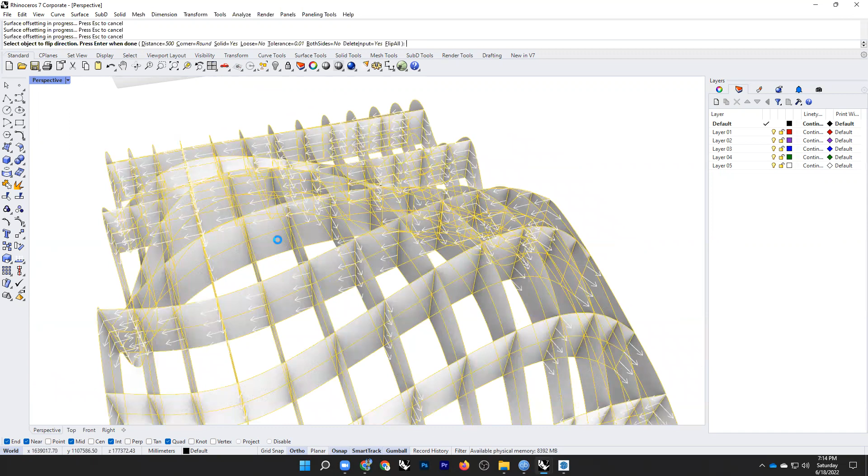Set this surface thickness to maybe 500. 500 is too low, let's be 5,000. So this is a very quick waffle structure.

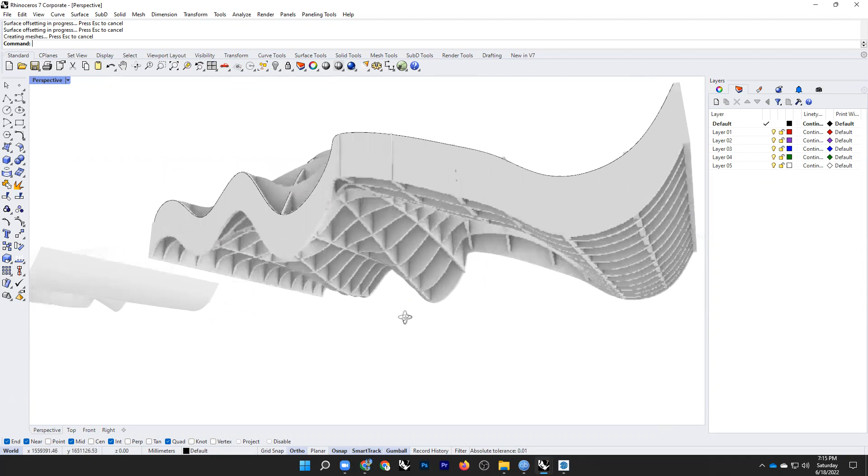So there's a lot of potential of Rhino that you can use, we'll learn in future classes. Yeah, this is only the beginning, it's the second class and you got this far. まだまだライノの可能性あるので、ぜひ引き続き第3回も受講していただければと思います。So, can I move on to the conclusion for today?